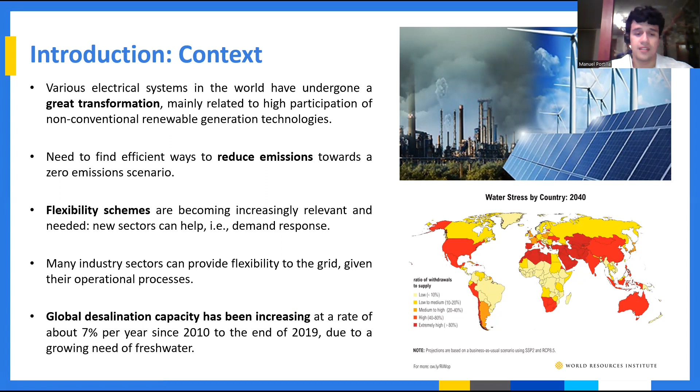Desalination is one of these sectors, and it is growing in capacity, increasing at a rate of about 7% per year since 2010 due to the growing need for fresh water. Going a little bit inside the desalination process, reverse osmosis is the main desalination technology, contributing the largest share of desalinated water production.

In a sentence, the process is one where water molecules are forced to flow in an opposite direction to the natural osmosis phenomenon to obtain desalinated water. Reverse osmosis is a highly energy intensive process.

This picture shows the scheme of a typical seawater reverse osmosis desalination process. I want you to focus on the part with the high pressure pump and the reverse osmosis system, because that's where the most energy is consumed.

In this study, we are focusing on this stage because, as we want to study the flexibility of a plant, we consider that we can change the operation point by shifting the frequency of operation of these high pressure pumps that increase the pressure of the water to make it flow through the reverse osmosis system, obtaining the two flows of brine and fresh water.

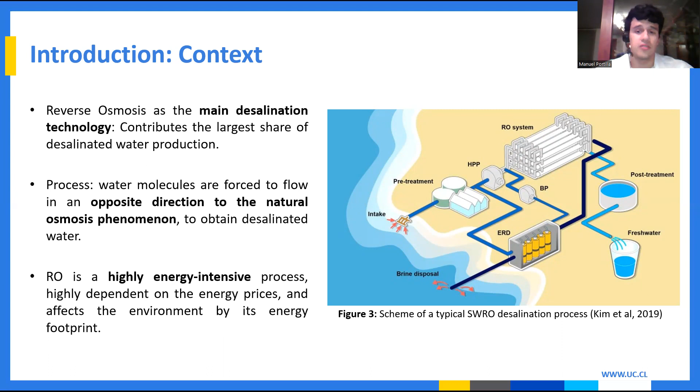This is a lot of text, but I want you to focus on some main ideas we found in the literature review. In the last years, research has taken a steer toward flexible opportunities of desalination and its integration with renewable energy sources.

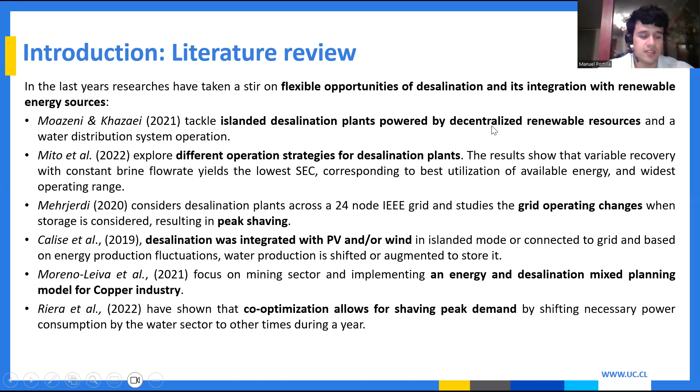We are seeing them tackling islanded desalination plants powered by decentralized renewable resources, for example, exploring different operation strategies for desalination plants, how grid operation changes with desalination, and its integration with solar photovoltaic or wind. So we see growing interest in this topic in recent research.

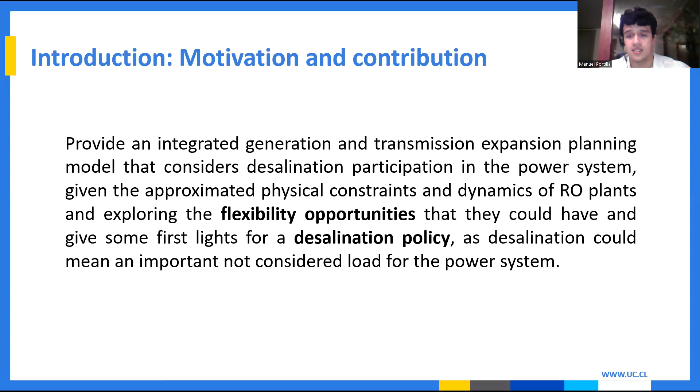From this context comes the motivation and contribution of this study, where the idea is to provide an integrated generation and transmission expansion planning model that considers desalination participation in the power system, given the approximated physical constraints and dynamics of reverse osmosis plants, exploring the flexibility opportunities they could have, and also providing first insights for desalination policy, as desalination could represent an important, not currently considered, load for the power system.

And now we are going to enter the methodology, which has 3 parts. It may be a lot of information, but the idea and goal of this study is to represent the desalination process in order to then consider it in the power system planning model.

We want to represent the reverse osmosis process and its energy consumption, and consider that component in the power system planning model to be co-optimized with the generation and transmission infrastructure, as well as the reverse osmosis or desalinated water system infrastructure.

So here we have an overview of the optimization model, where we are in the shoes of a centralized planning figure that optimizes both the power system and the desalinated water system. Both have their own cost components and constraints, but they are linked in this red component, which is the energy consumption of the desalinated water plant, included in the power balance between load and generation in the power system.

So we have a mixed integer linear programming model, and it's based on Switch, which is a platform for planning high renewable power systems.

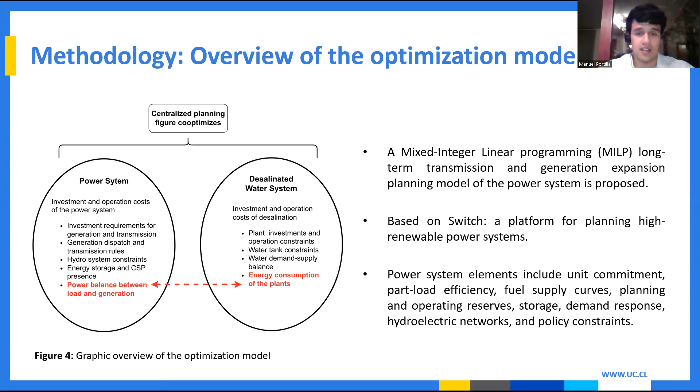As I mentioned, we have this desalinated water system, and we want to build a module of it to include in Switch. But to represent it in the optimization model, we have to take a previous step, because reverse osmosis plants are usually modeled and simulated with the solution diffusion model, which describes the performance of the reverse osmosis process and how the flows and concentrations of the solids change accurately.

But the equations of the model are highly non-linear, which makes its implementation in this proposed expansion planning model very difficult. So in order to consider the operation of the plant in the planning model, we have to take a previous step to obtain a linear relationship between the permeate flow produced and the energy consumption associated to it.

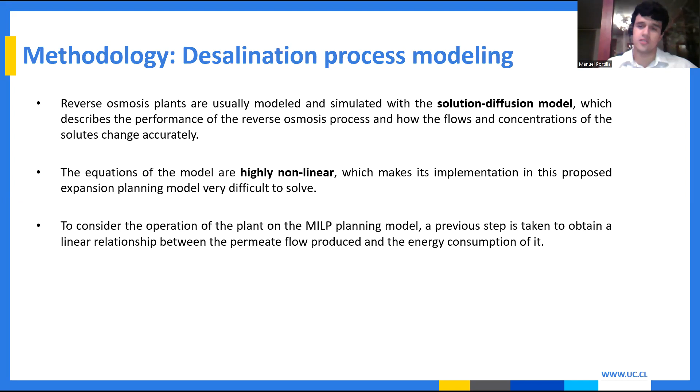So to summarize, this is the algorithm we modeled to obtain this linear relationship. The approach consists of searching for the range of feasible operation frequencies for a defined plant by testing an input frequency on an optimization model containing the equations of the approximated solution diffusion model.

So we have the operating range of the plant, and by shifting the input frequency that the high pressure pump has, given by the variable frequency drive, we can move through this operating point. The associated parameters constrained by the solution diffusion equations are going to change throughout this frequency range.

So at the end of the day, by trying all of these frequencies, we want to map the operation point and the relationship between the permeate flow that we obtain from the plant, which is the fresh water, and the energy consumption associated to this.

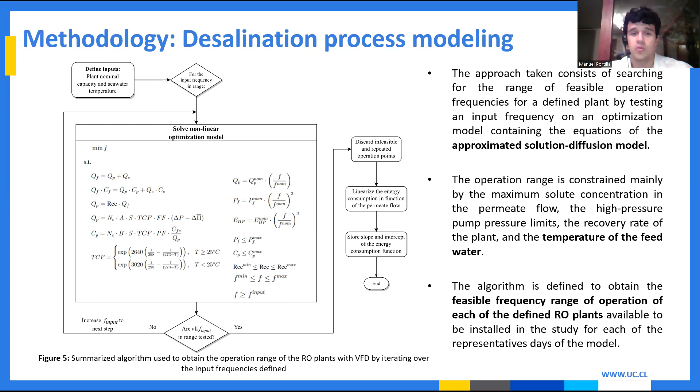So at the end of the day, the algorithm is defined to obtain the feasible frequency range of operation of each of the defined reverse osmosis plants available to be installed. So we are seeing that, and the results of this part are shown here.

We have many parameters that affect the solution diffusion model and affect the production of fresh water, and one of them is temperature. As we are seeing a Chilean case study, the water temperature changes from north to south, and also throughout the year.

So we see some seasonality in the process. For the winter months we have a much narrower range, and for summer or warmer months we have a wider range of operation. Here we have, on the x-axis, the permeate flow produced by the plant in cubic meters per hour, and the total energy consumed by the plant associated to it in kilowatt hours.

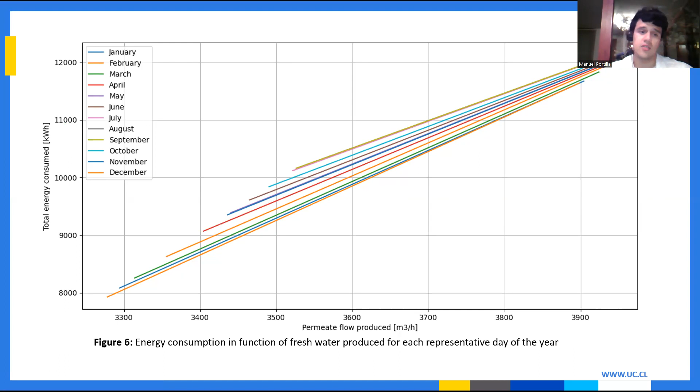So having this representation and this linear relationship, which at the end of the day is a slope and an intercept for each representative day, we have the desalinated water system model, which consists of the operation of the desalination plants based on a forecasted water demand provided as an input in each water zone, where the desalinated water demand must be supplied in the most efficient way. The desalination model is divided into equations for the plants and water tank, for investment and for operation.

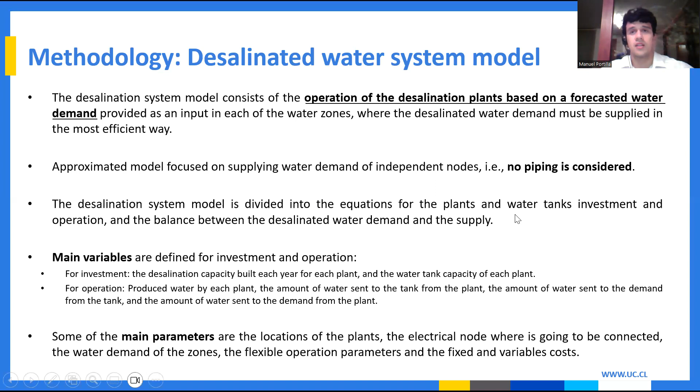Some of the main parameters of the model are the location of the plant, the electrical node where they are going to be connected, the water demand of the zones, and the flexible operation parameters, which we obtained in this previous step, and also the fixed and variable costs associated to the investment and operation of these plants. Now, digging a little bit deeper on the model, we have first of all the components associated to the power system, but I'm not going to stop on that.

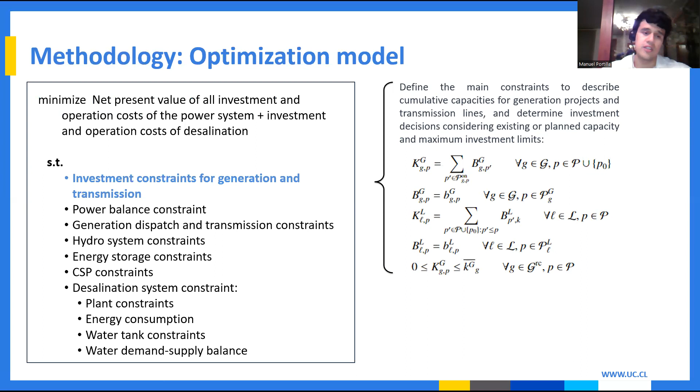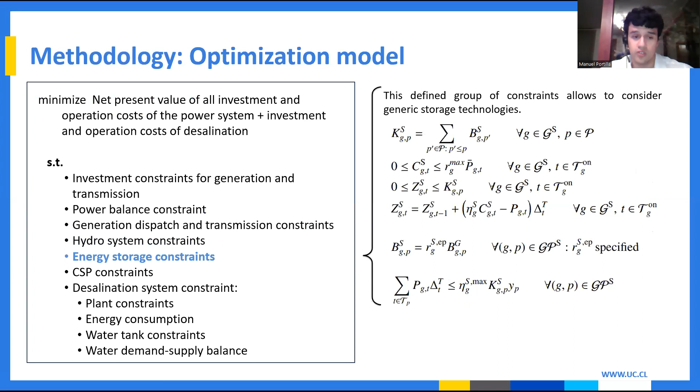The model minimizes the net present value of all investment and operation costs of the power system and also the desalination system. Then we have the constraints, where for the power system are the investment constraints for generation and transmission. We have the power balance constraint, the generation and dispatch transmission constraints. We have the hydro system constraints, also the energy storage constraints, and also the concentrated solar power constraints, which are based on the work of Mena in 2019.

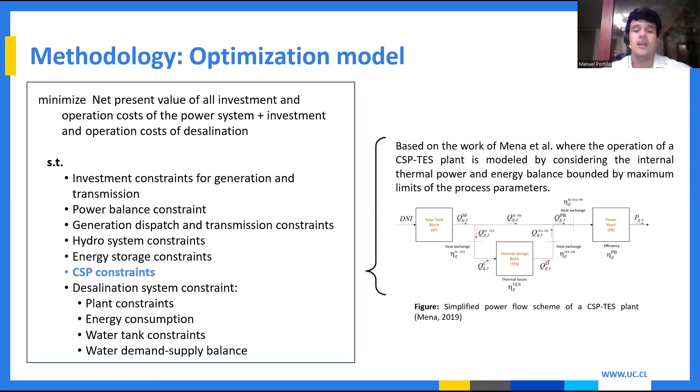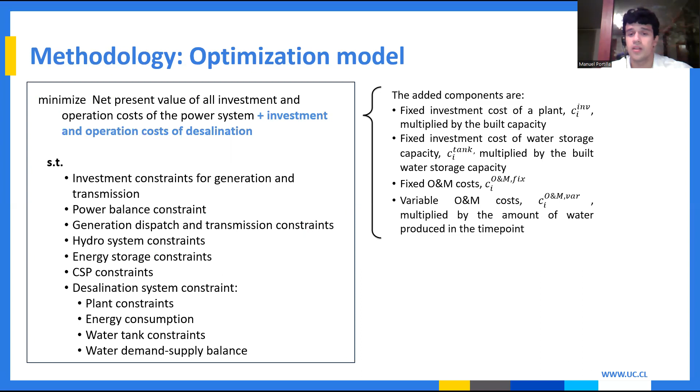Then in terms of constraints, we have a group of constraints added to the model, which first of all, for the plant, we have the total units built of the plant in each of the periods, which is the accumulated capacity or desalination capacity of each plant. We have the minimum and maximum amount of desalinated water that a plant can produce.

We have the water balance of the plant, because in this study we say that the plant can either send water directly to the demand, or it can send it or store it in the water tank. Then we have the energy consumption constraint, which at the end of the day is added to the energy balance equation of the power system planning model, which links both of these systems. And here is where the linear approximation that we made comes into play.

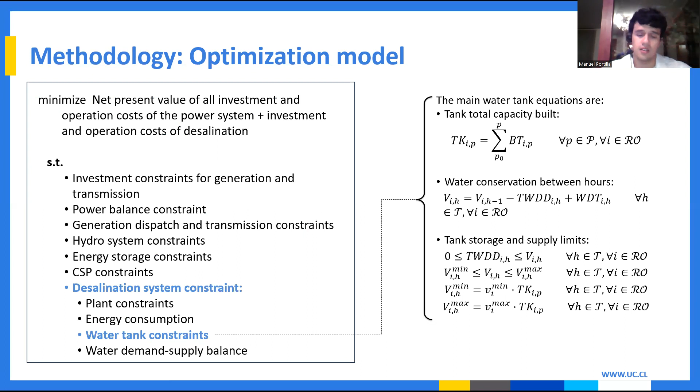Then we have the water tank constraints. Here the main water tank equations are that again the tank total capacity built, which is the accumulated storage capacity in each period. We have the water conservation between hours, and we have also tank storage and supply limits, which consist of maximums and minimums and the border conditions of the storage.

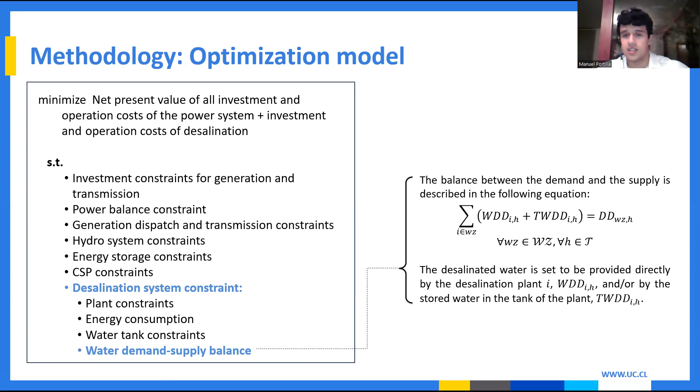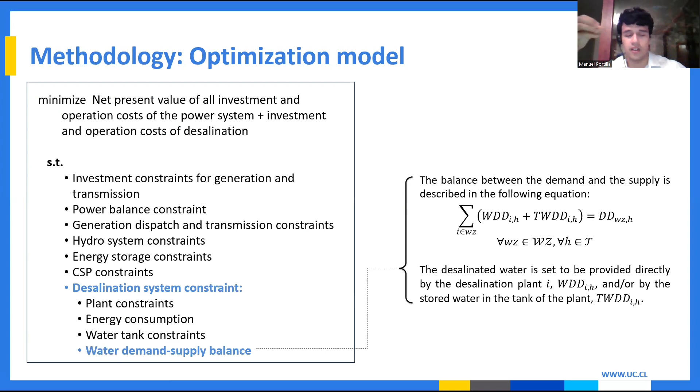And finally, we have the water demand supply balance, which is the balance between the demand and the supply of water. Here the demand is said to be supplied by either the water that we have stored in the water tank or the water given by the reverse osmosis plant directly, or both of them combined.

And now entering the case study. For the power system, we are seeing the Chilean power grid, which is modeled as 26 nodes, and it's an approximation of the national electrical system. The scope of the project is from 2025 to 2040, considering 12 representative days in each investment year to capture the planning and approximated operation dynamics for the different scenarios proposed.

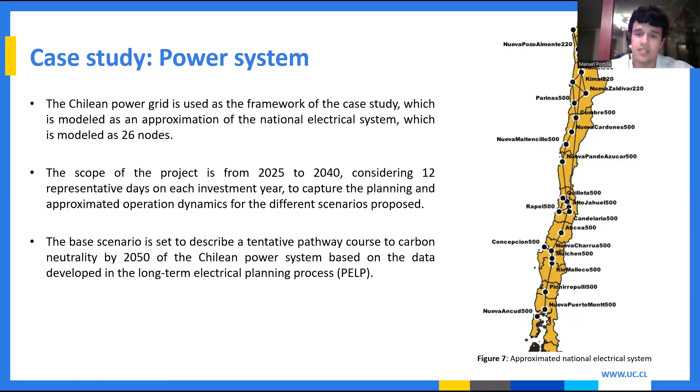The base scenario is set to describe a tentative pathway towards carbon neutrality by 2050 of the Chilean power system, based on the data developed in the long-term electrical planning process done by the ministry. Then for the desalinated water zones, we have...

They define the places where desalinated water is going to be used as a resource, and the definition of them is based on the concept of a hydrographic basin, which is also based on high water shortage levels obtained from a few studies where they mapped the more stressed basins in Chile. From these reports, we clustered them into 13 critical zones, which are shown in figure 8 in red, and in the table with the associated code, the associated electrical node from where they are going to consume energy, and the basins which are in this cluster.

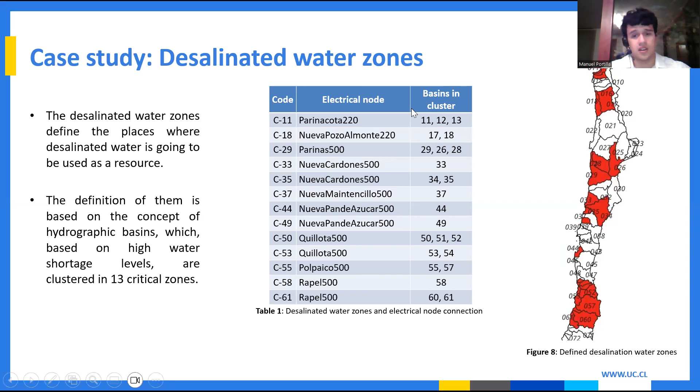Then we have the desalination demand, and here the forecasted desalinated water demand depends on various factors, such as increasing water stress levels, the evolution of the different water demand sectors, also water use policies and efficiencies regarding water usage. And in fact, it's based on Caldera and Breyer, and also the DGA water demand projections for 2030 and 2040.

We defined 3 scenarios of desalinated water demand based on the first study and the methodology that they used. They are the base scenario, the irrigation efficiency push scenario, and also a scenario with the highest possible irrigation efficiency, which only changes the amount of desalinated water demand that we are going to require in each of the periods that we are looking at in this study.

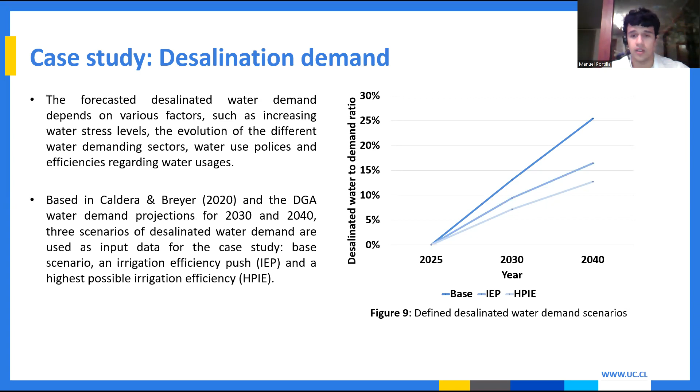With all of this information and all of these parameters summarized, we have the proposed scenarios, constructed by joining each of the different desalinated water demand levels described previously with the different operation configurations of the plants. So we have 3 main scenarios: the base scenario with no desalination, and then 2 desalination scenarios. The first is the base irrigation scenario, which consumes the most desalinated water, and then the highest possible irrigation efficiency scenario with the lowest energy and lowest desalinated water demand.

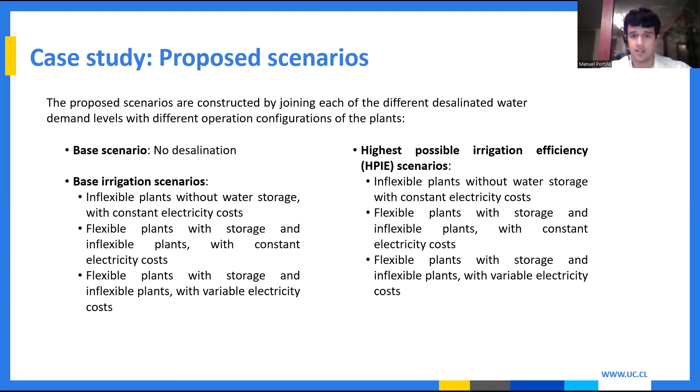Inside these 2 desalination scenarios, we have three sub-scenarios: first, we consider only inflexible plants without water storage with constant electricity costs. Then we have flexible plants with storage and also inflexible plants with constant electricity cost. Finally, we have the same flexible plants with storage and inflexible plants, but now with variable electricity costs, to also capture and analyze what happens when the electricity prices that the desalination plants pay affect their operation. And for the results,

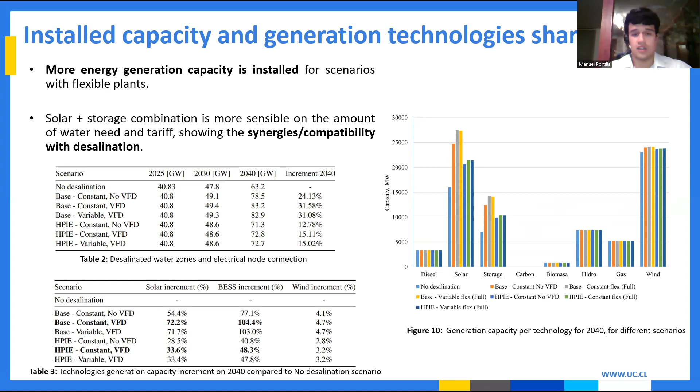we first see that for installed capacity and generation technology share, more energy generation capacity is installed for scenarios with flexible plants. But we see that the combination of solar and battery storage is more sensitive to the amount of water needed and the tariff, showing that there are some synergies and compatibility with desalination. This is also because the desalination plants are forecasted to be more needed in the north and center, where we also have a lot of solar resource.

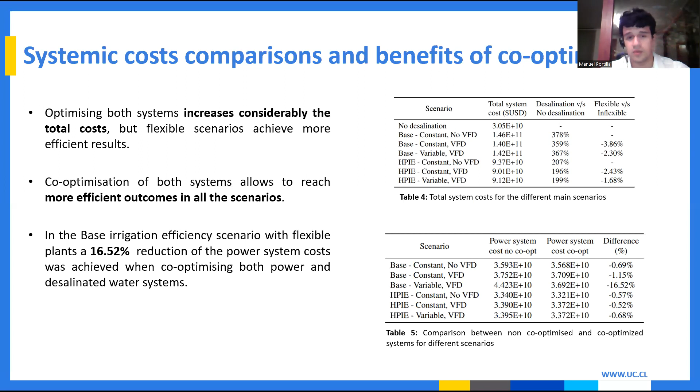Then in terms of systemic cost comparisons and the benefits of co-optimization, we see that optimizing both systems increases considerably the total cost, but flexible scenarios achieve in some cases more efficient results. We see that co-optimization of both systems allows reaching more efficient outcomes in all scenarios. In the base irrigation efficiency scenario with flexible plants, in fact, a 16% reduction of the power system cost was achieved when co-optimizing both power and desalinated water systems.

Now, in terms of emissions and their evolution, we see that overall emissions increase with the use of desalination, mainly because of gas generation during periods when solar energy is not as available as it could be. This showed that the efforts to decarbonize the energy sector in 2050 are going to be harder when considering new demands and their increase, challenging more the transition to a net zero goal.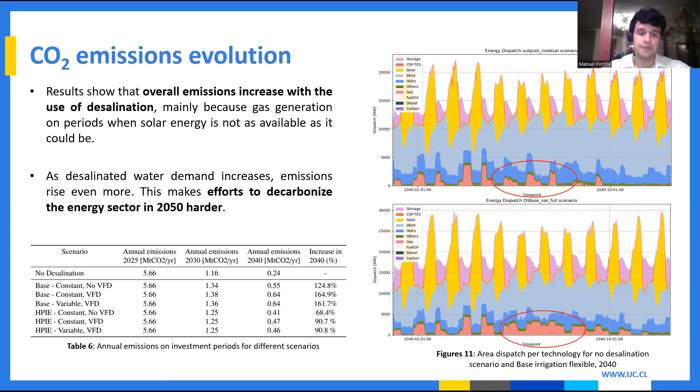Then in terms of plant and tank investment, we see that when more water is needed, of course more desalination plants are built, but as flexible operation is allowed, there is a reduction in the number of plants required. We also find that the optimal mix of plants built is affected by the structure of the electricity cost and also by the type of energy generation projects in the associated electrical node.

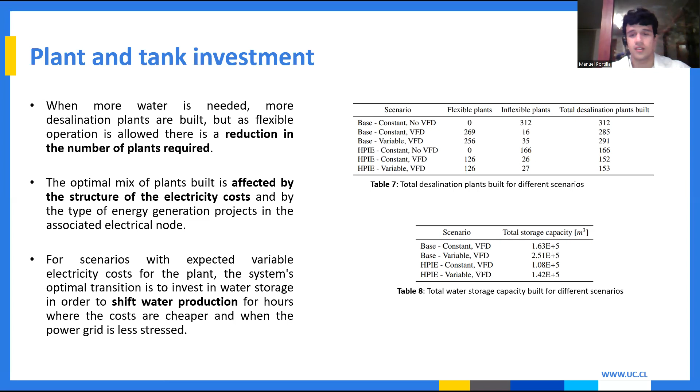And finally, for scenarios with expected variable electricity cost for the plant, the system's optimal transition is to invest in water storage in order to shift production to hours where costs are cheaper and the power grid is less stressed. In terms of the usage of this water storage, we see that it allows for efficient water utilization and management, reducing the need for instantaneous production, particularly when we have the variable frequency drive.

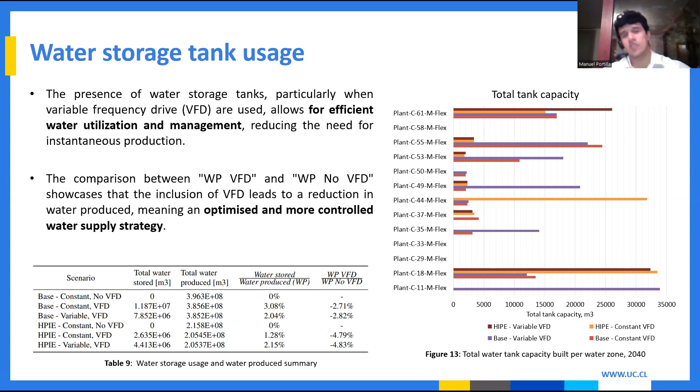We also see that when we compare the water produced with a variable frequency drive versus without it, including this VFD leads to a reduction in the water produced, meaning an optimized and more controlled water supply strategy.

And now, in terms of the energy consumption of the desalination process in general, along the whole power system, we see that the electricity cost affects the desalination load curve, which shifts energy consumption to particular hours of the day. In fact, when flexibility is available in desalination operation, we see that plants are used during solar availability, shifting the production.

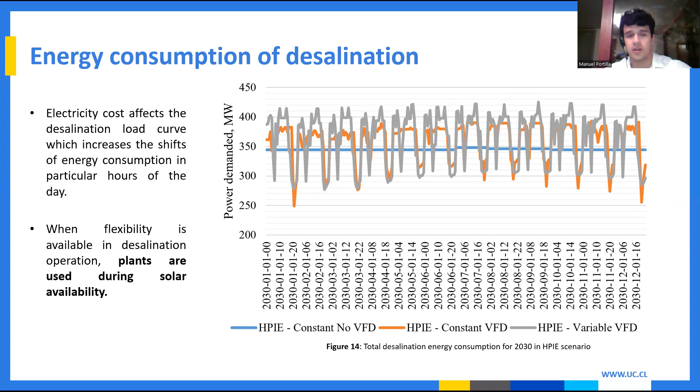And finally, in terms of water cost, we see that costs are similar, but for cases with higher water demand expected, the values are smaller than when less water is needed. So we could see a bit of scale economies.

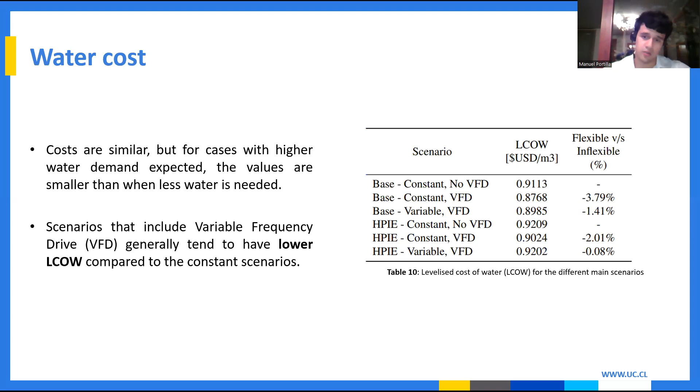And we have also that scenarios that include variable frequency drive generally tend to have lower levelized cost of water compared to constant scenarios. And to close the presentation and the recording, for the conclusion and the future work, first of all,

we see that desalination is going to be a relevant electrical load in the coming years as the impacts of climate change are translated into higher water scarcity.

And we see with the results that the generation capacity under desalination participation scenarios increases considerably, reaching almost 32% more installed capacity in 2040.

And related to these first two points, the combination of generation technologies joined with desalination plants' energy consumption creates valuable synergies for the power system when considering and assuming that desalination is going to enter as a new load in the system.

And we see that investment in desalination plants and water storage tanks is influenced by the water demand, obviously, and the electricity costs used to operate the plant.

And finally, we have that the different defined scenarios have shown different outcomes on the strategies of operation and investment of the desalinated water and the power system, but including flexible plants in the available investment portfolio, reverse osmosis plants led to more efficient systems in terms of total cost.

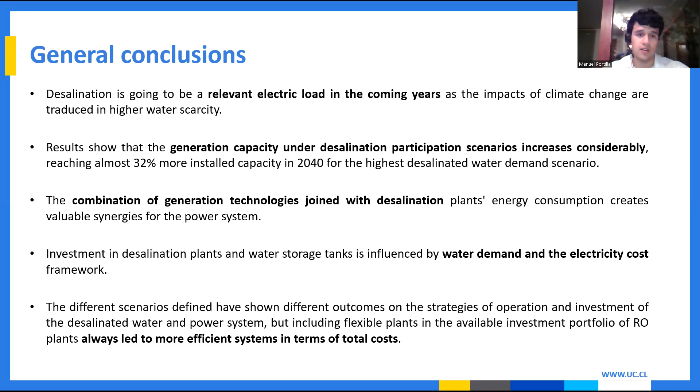It's a small reduction, but it reduced the costs, the total cost.

And in terms of political or policy impacts of the results, we see that co-optimisation of both systems allows more efficient outcomes in all scenarios, showing that starting to elaborate a centralized and coordinated regulatory framework is extremely relevant to achieving an efficient development of this technology.

We also see that one of the main challenges for the near future will be setting the regulatory framework to give the right economic signals to incentivize and orient the operation of desalinated water infrastructure to a flexible scheme.

And it's also interesting to analyze from the regulatory scope the scheme to coordinate the operation of the plants, to open opportunities for new entities, such as an independent water system operator, for example, or participation in current or new demand response mechanisms.

And finally, even when mainly all generation capacity installed is renewable, carbon emissions increase for years 2030 and 2040, making efforts to decarbonize the energy sector to 2050 even harder.

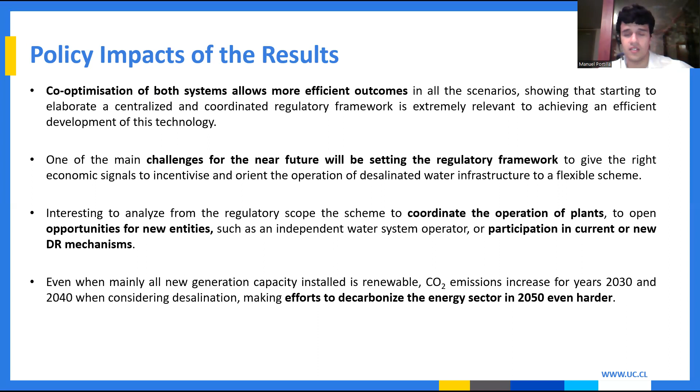And just for future work, the dynamic of the operation, and particularly desalination constraints such as minimum on and off time in greater detail, were not studied in this work.

So understanding and modeling water supply for scarce areas in detail, considering water transport through pipes, becomes relevant to understand the impact in a local framework.

Also, from a more local point of view, desalinated water demand is going to be needed in more than one sector, so multipurpose plants are going to be a more efficient solution.

So exploring and considering different water demand profiles on these types of studies would provide interesting insights to understand and see the real value in a local perspective for different nodes and different load water demand profiles in each of these zones.

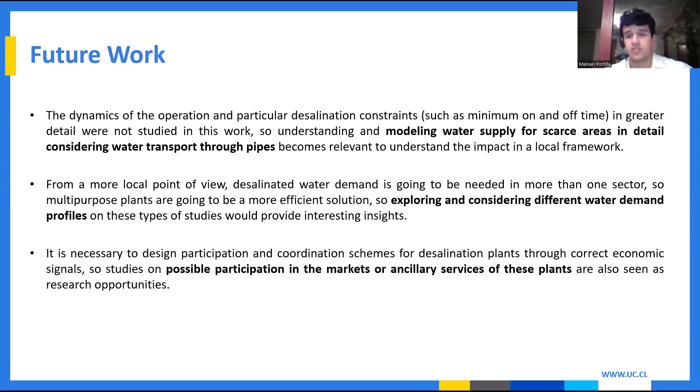And it's also necessary to design participation and coordination schemes for desalination plants through correct economic signals. So studies on possible participation in the market or ancillary services of these plants are also seen as research opportunities.